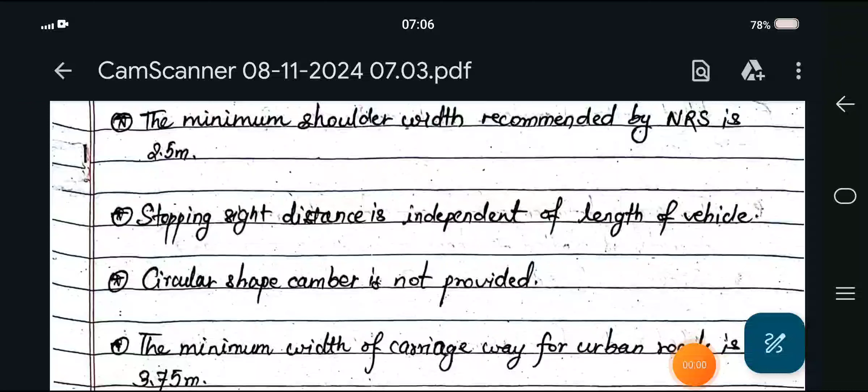Transportation engineering license exam important points: the minimum shoulder width recommended by NRS is 2.5 meter. Stopping sight distance is independent of length of vehicle. And circular shape camber is not provided.

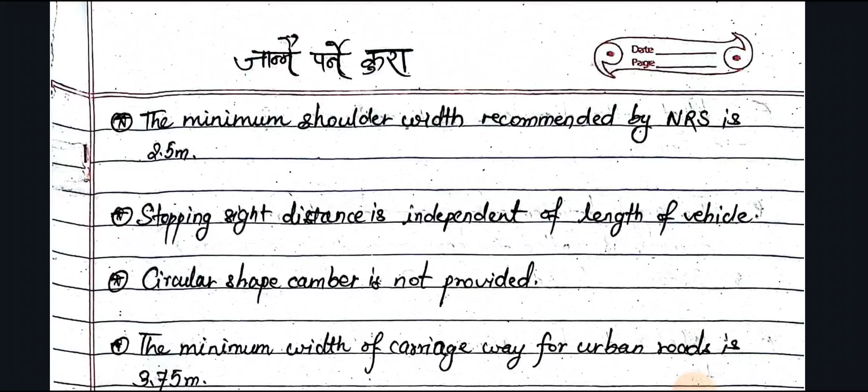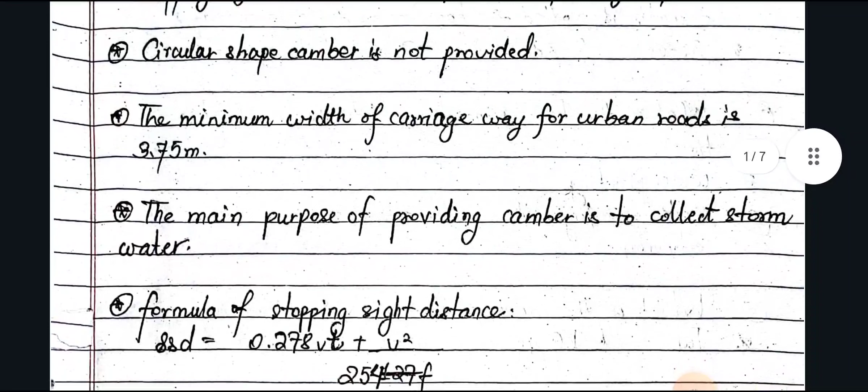They may ask which shape camber is not provided - you should tick circular shape. The minimum width of carriageway for urban roads is 3.75 meter.

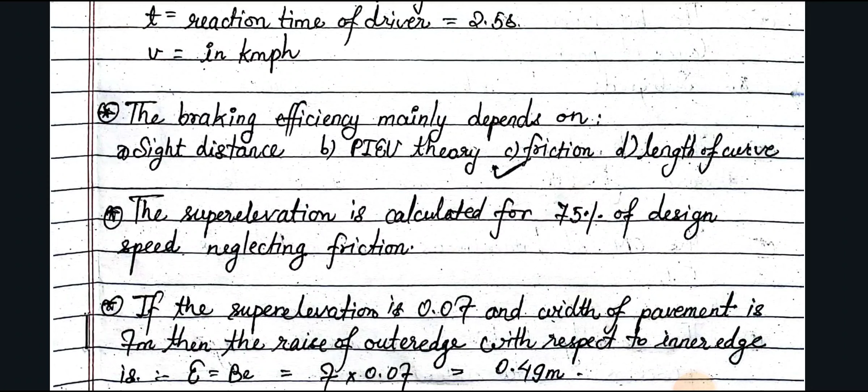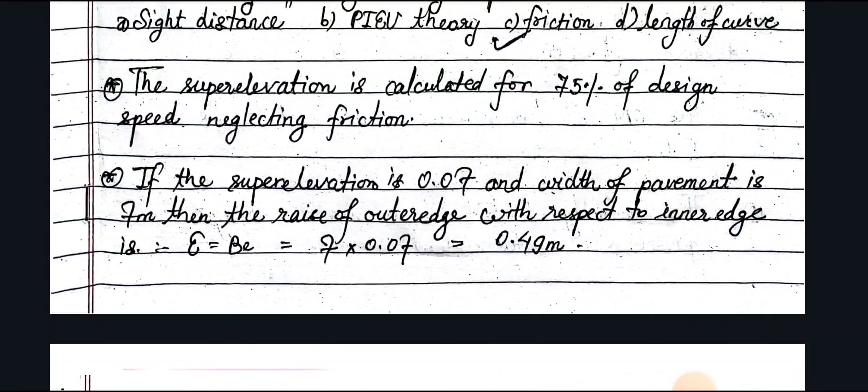If the super elevation is 0.07 and width of pavement is 7 meter, then the rise of outer edge with respect to inner edge is asked. The formula is E equals B times e, that is 7 × 0.07 = 0.49 meter, meaning 49 centimeter.

The mechanical widening of the track is given by NL square upon 2R, where R is radius. The ratio between centrifugal force and the weight of the vehicle is called the impact factor.

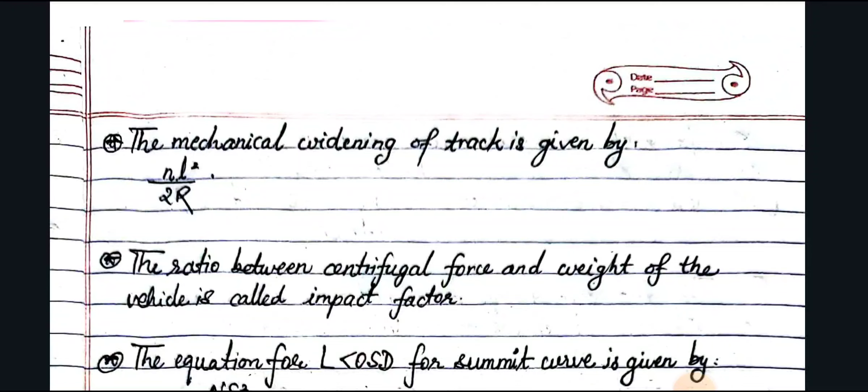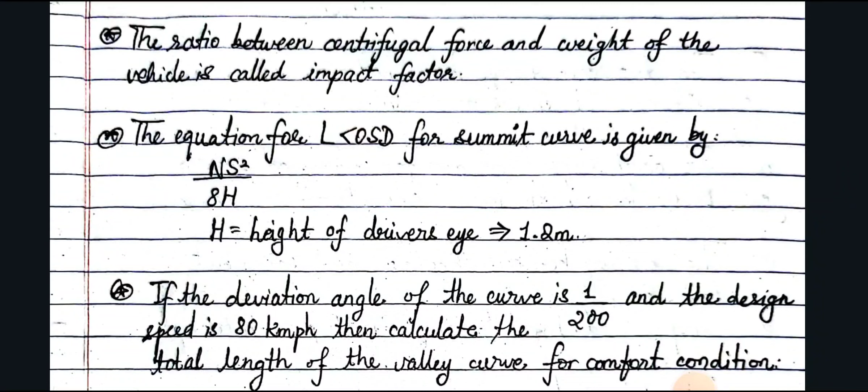Impact factor is centrifugal force upon weight of the vehicle. The equation for length of curve less than overtaking sight distance for summit curve is given by NS square upon 8h.

H equals height of driver's eye, that is 1.2 meter. If the deviation angle of the curve is 1/200 and the design speed is 80 km per hour, calculate the total length of valley curve for comfort condition. The formula for comfort condition for valley curve is 0.38 times root under N V cube, where V is speed in km per hour and N is deviation angle.

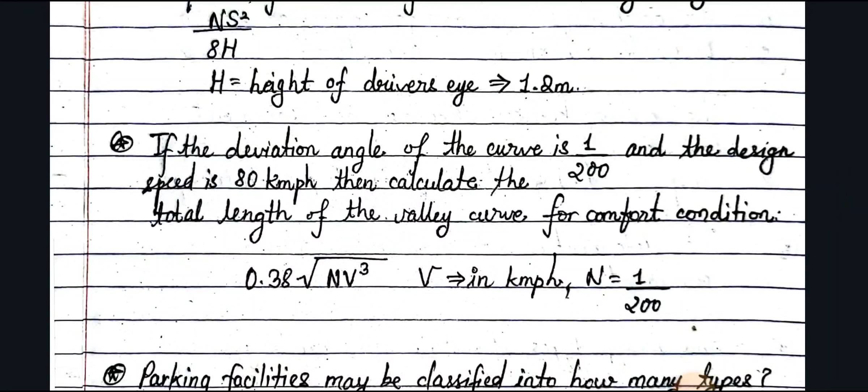Parking facilities may be classified into 2 types: on-street parking and off-street parking. Maximum number of cars can be parked in 90-degree parking.

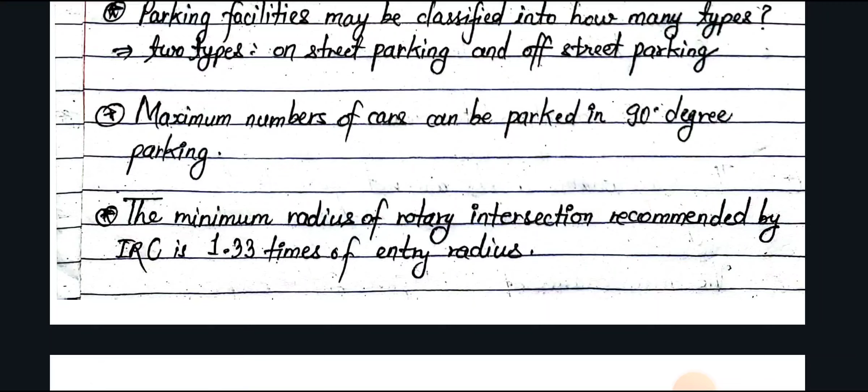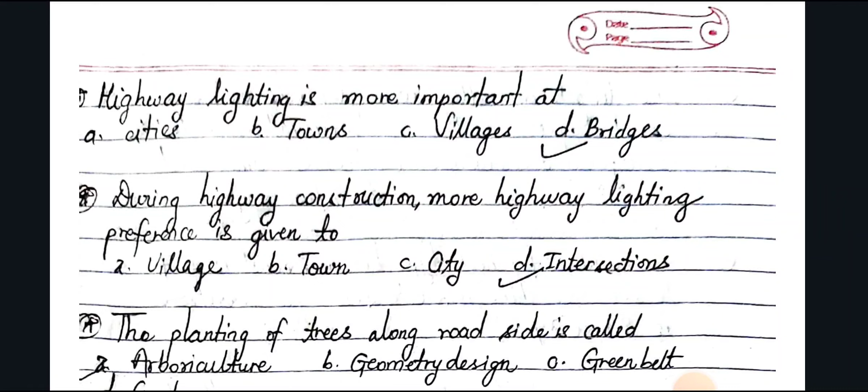The minimum radius of rotary intersection recommended by IRC is 1.33 times of entry radius. Highway lighting is more important at bridges. During highway construction, more highway lighting preference is given to the intersections. The planting of trees along roadside is called arboriculture.

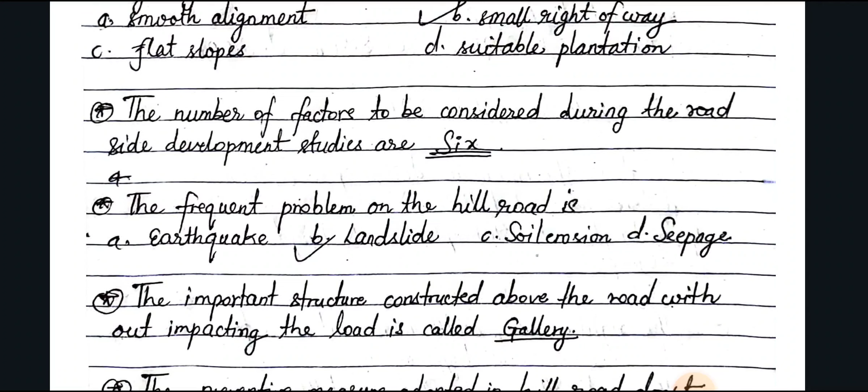The point that should not be considered for a better highway is small right of way. The number of factors to be considered during roadside development studies is 6 factors. The frequent problem on hill roads is landslide.

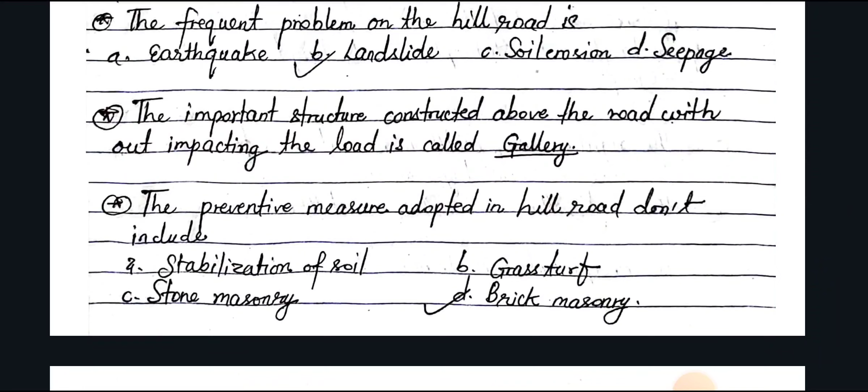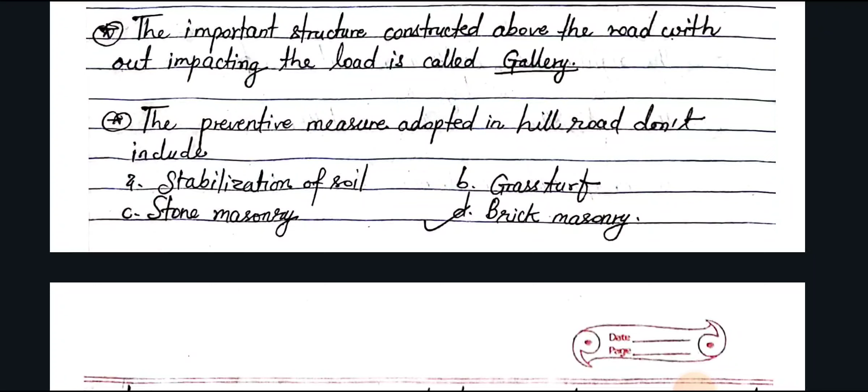The important structure constructed above the road without impacting the load is called the gallery. The preventive measure adopted in hill roads doesn't include brick masonry, because brick masonry is difficult to construct in hill roads, whereas stone masonry is preferred.

What is the maximum gradient compensation for a pavement of radius 150 meter? That is 75/R, that is 2%. What is the value of the valley curve when compared with summit curve for same design speed? It depends upon the deviation angle.

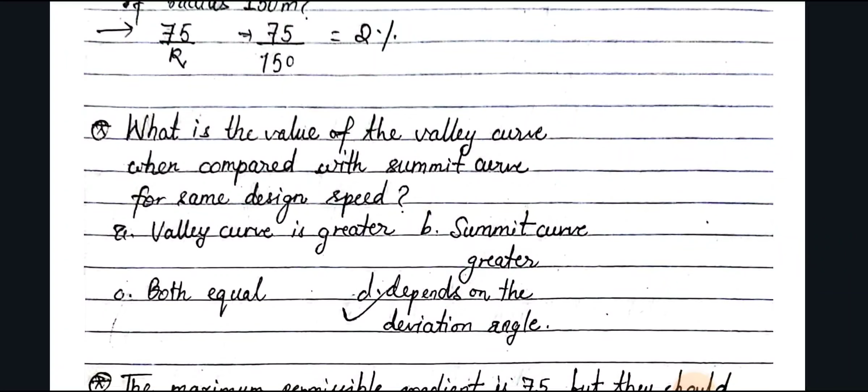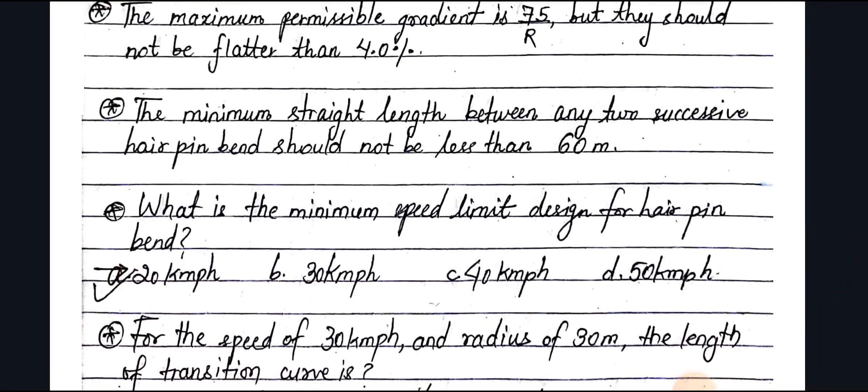The maximum permissible gradient is 75/R, but they should not be flatter than 4%. The minimum straight length between any two successive hairpin bends should not be less than 60 meter. What is the minimum speed limit designed for hairpin bend?

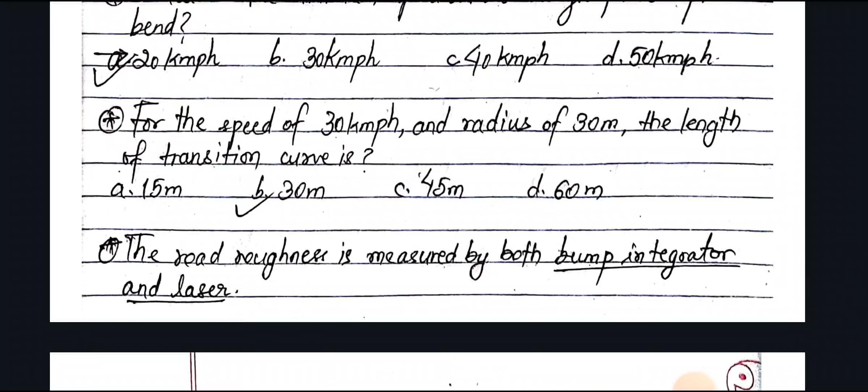For hairpin bend, 20 km/h is the speed limit. For the speed of 30 km/h and radius of 30 meter, the length of transition curve is 30 meter. Road roughness is measured by both bump integrator and laser.

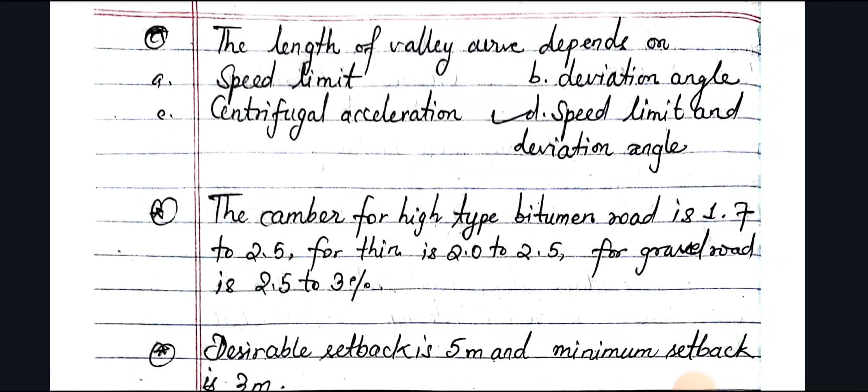The length of valley curve depends upon the speed limit and deviation angle. The camber value for high type bitumen road is 1.7 to 2.5. For thin surfacing it is 2.0 to 2.5, and for gravel road it is 2.5 to 3%. Desirable setback is 5 meter and minimum setback is 3 meter.

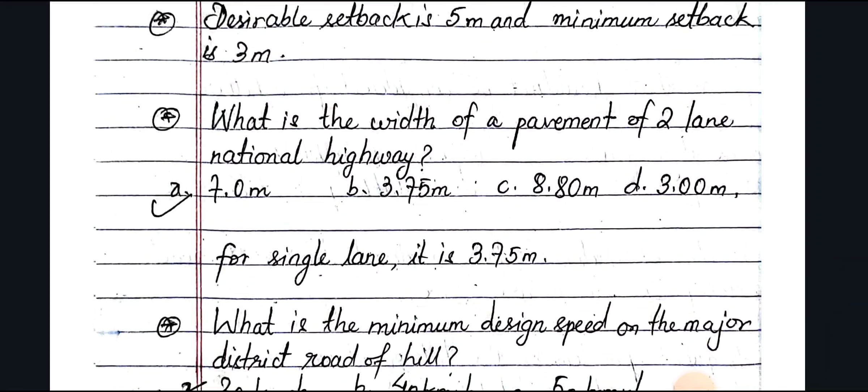What is the width of pavement of two-lane national highway? That is 7 meter. For single lane it is 3.75 meter. What is the minimum design speed on the major district road of hill areas? That is 30 km/h minimum design speed.

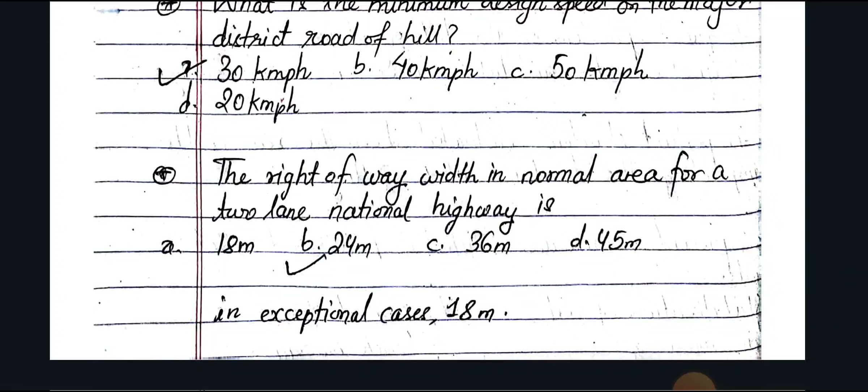The right of way width in normal area for two-lane national highway is 24 meter. In exceptional cases it is 18 meter. Higher compaction will result in less absorption of water. The bitumen giving better results is cut back bitumen.

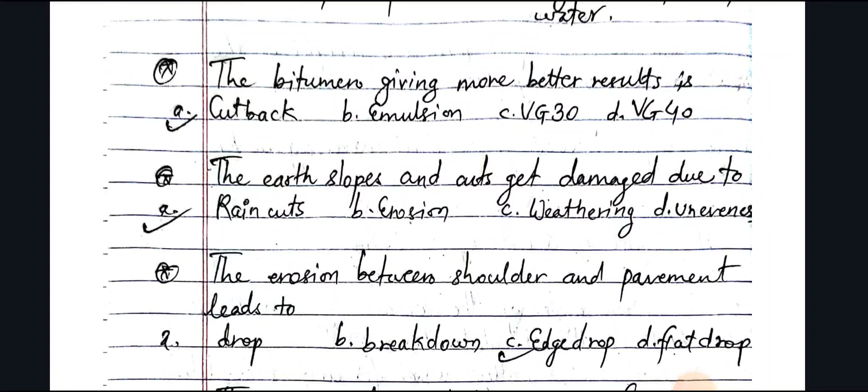The earth slopes and cuts get damaged due to rain cuts. The erosion between shoulder and pavement leads to edge drops. The deterioration rate is more in flexible pavement than rigid pavement.

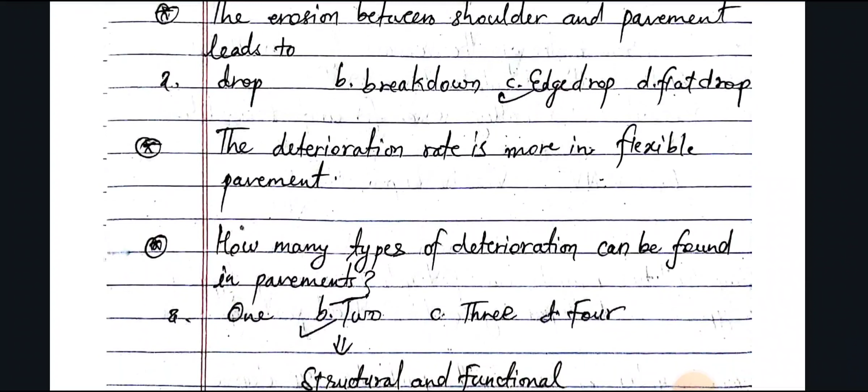How many types of deterioration can be found in pavements? Two types, structural and functional deterioration. Maintenance works are not possible for subgrade. The maintenance of rigid pavement is easy.

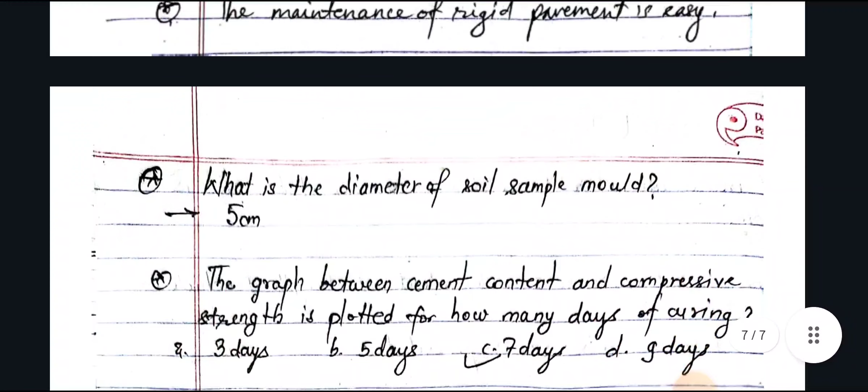What is the diameter of soil sample mold? That is 5 cm. The graph between cement content and compressive strength is plotted for how many days of curing? 7 days of curing. What is the basic principle of bituminous stabilization?

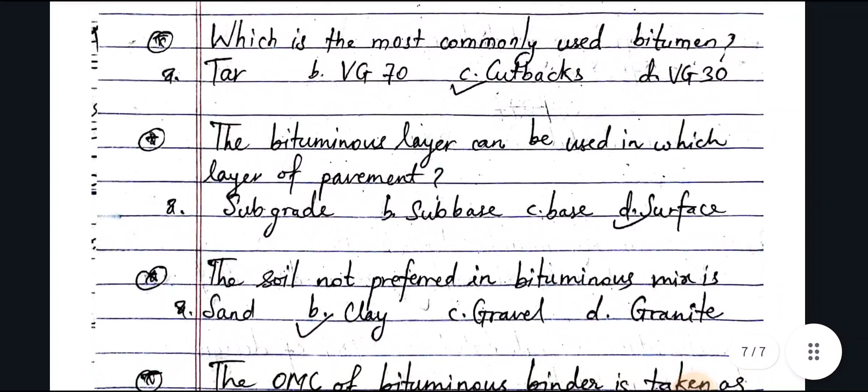Waterproofing with cohesion. Which is the most commonly used bitumen? Cut back bitumen. The bituminous layer can be used in which layer of pavement? Surface layer. The soil not preferred in bituminous mix is clay.

The OMC of bituminous binder is taken as 5%. The stability of bituminous mix is always greater with water content.